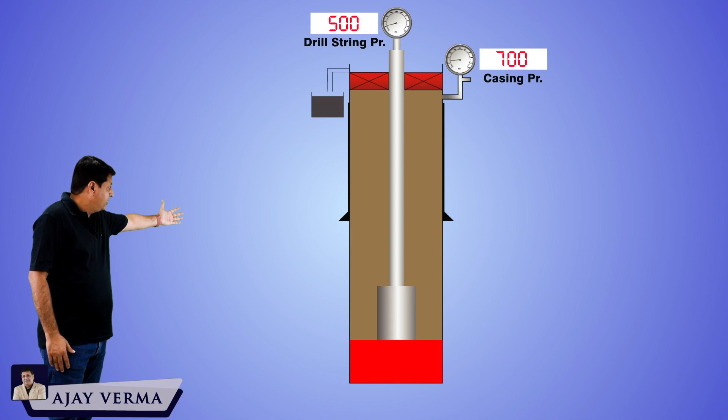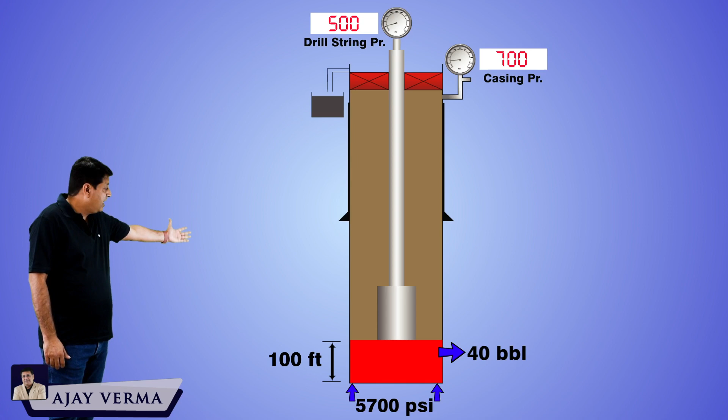In this figure, let's say the well is shut in on a gas kick. This is all assumption: gas height is 100 feet and the volume of bubble is 40 barrels. Formation pressure is 5700 psi and bubble pressure is 5600 psi. Shut-in drill pipe pressure is 500 psi, whereas shut-in casing pressure is 700 psi. Now this is at the time of shut-in.

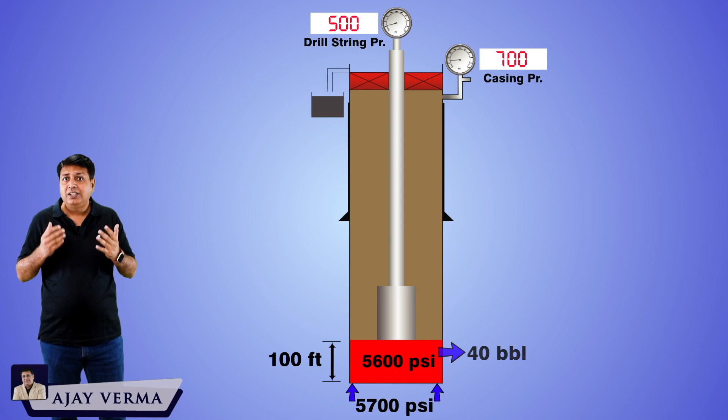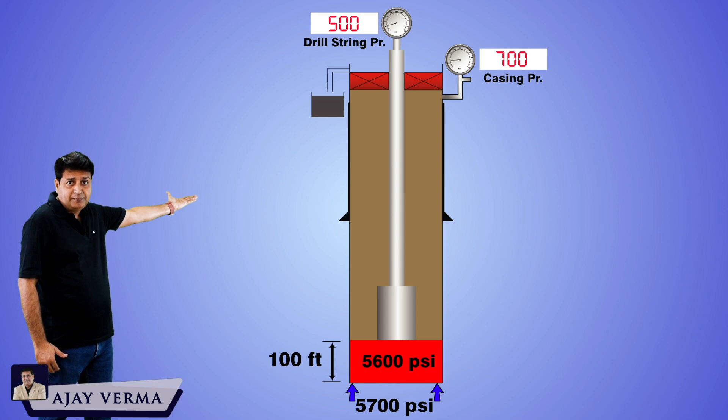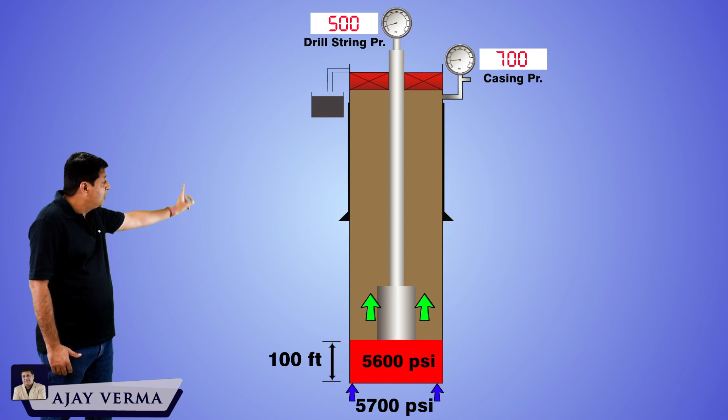If I don't kill this well, then it is the tendency of lighter fluid to rise to the top. So this lighter fluid, which is gas in this case, will start migrating upwards. Now to move upward, it has got a big hydrostatic head and a back pressure above it, so in order to go up, it has to apply pressure upwards. In this case, the gas applies pressure upwards.

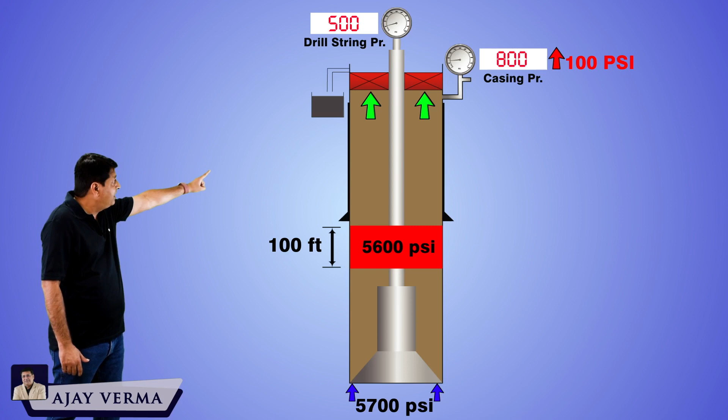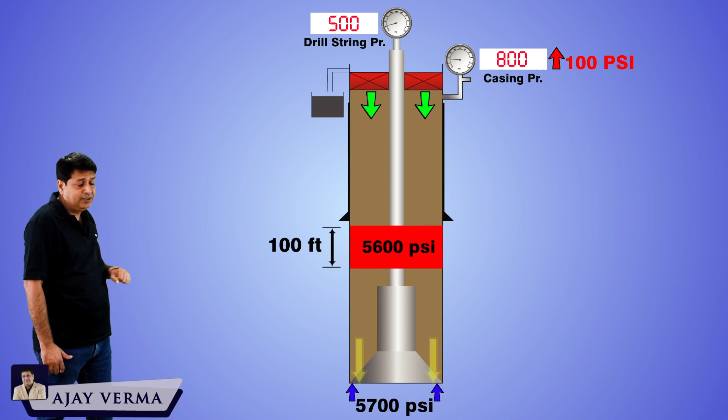As a result, what will happen to casing pressure? Casing pressure will increase - while moving upwards, the bubble will increase casing pressure. Then the additional casing pressure can't go past through the BOP. So this pressure which is going upwards will not pass to the BOP - it will be reflected backwards, becoming a back pressure. So it goes down to the bottom of the well and it will increase the BHP.

Let's say casing pressure increase due to migration is 100 psi. So the same additional 100 psi will come down and increase BHP, which is again equal to 100 psi. Now let's say if there is no float in the drill pipe, then the same 100 psi will enter into the drill pipe and drill pipe pressure will also increase by 100 psi.

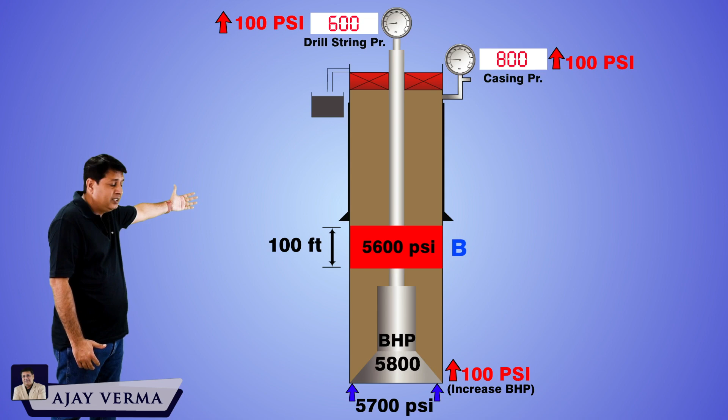Now after 1 hour, let's say the bubble is at a new position - point B. Since there was no space for the bubble to expand, the height of the bubble remains the same, that is 100 feet. And since the height is not changing, the internal pressure or volume is also not changing. So the pressure is equal to the initial pressure of the bubble, that is 5600 psi.

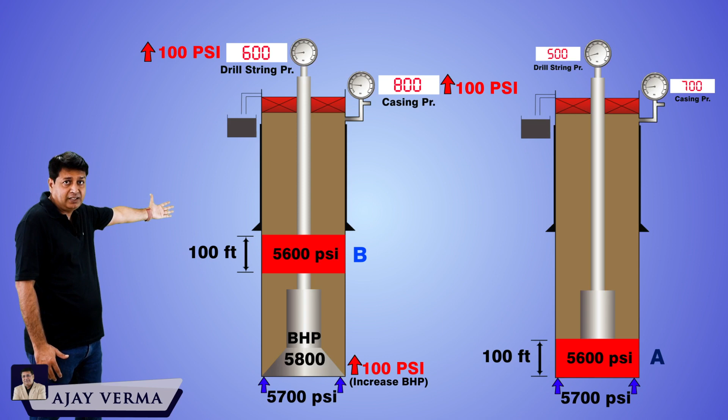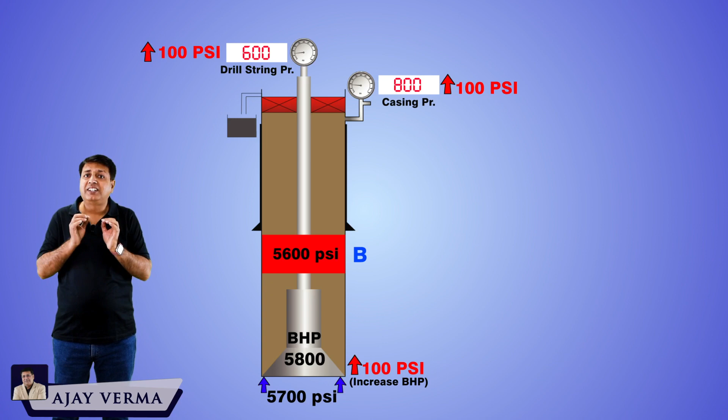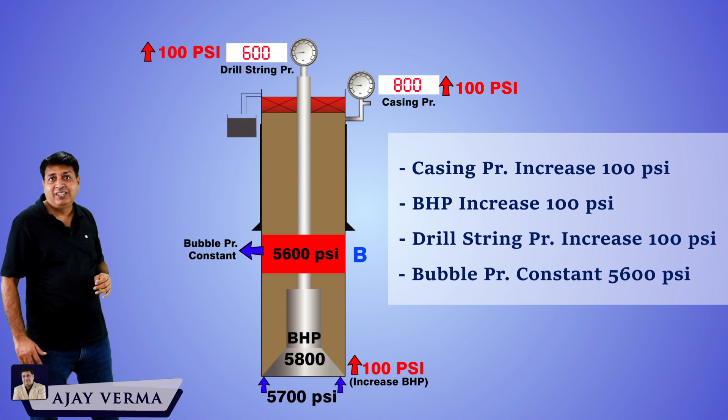So the conclusion of this whole clarification is: due to gas migration, all the pressures in the wellbore will increase by an equal amount. Only one pressure remains constant, and that is the internal pressure of the bubble. In this example, due to migration, casing pressure increased by 100 psi, BHP also increased by 100 psi, and drill pipe pressure also increased by 100 psi. But the bubble pressure remains constant. So this is the summary of closed well gas migration.